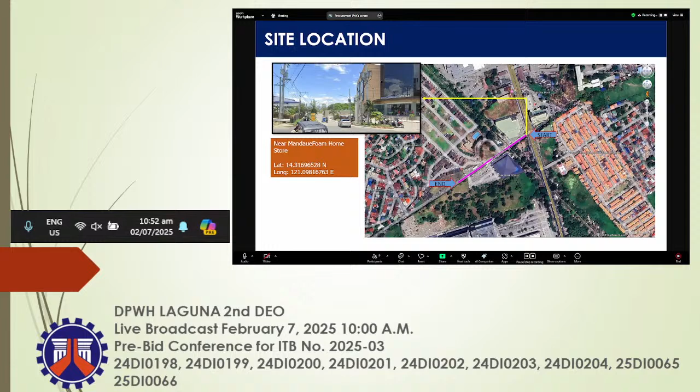For the site location, the construction is right by the overhead road, right beside the MandaueFoam Home Store. These are the site photos.

For the summary of quantities: Part A, facilities for the engineer, provision of field office for the engineer, provision of furniture, fixtures, equipment and appliances for the field office for the engineer, and provision of progress photographs. Part B, other general requirements: project billboard, signboard, occupational safety and health program, traffic management, and mobilization/demobilization.

Part C, earthwork: removal of actual structures, obstruction, 0.20 meter thick PCCP, surplus common excavation, and subgrade preparation. Part D, subbase and base course: aggregate subbase course, and Part E, surface courses: Portland cement concrete pavement, 0.23 meter, 14 days.

For the minimum equipment: backhoe with breaker, dump truck, motorized road grader, vibratory roller, concrete vibrator, bar cutter, and joint sealer machine. For the typical cross section, we have an average width of 4.5 meters, with 0.23 meter thick PCCP and 0.20 thick aggregate subbase.

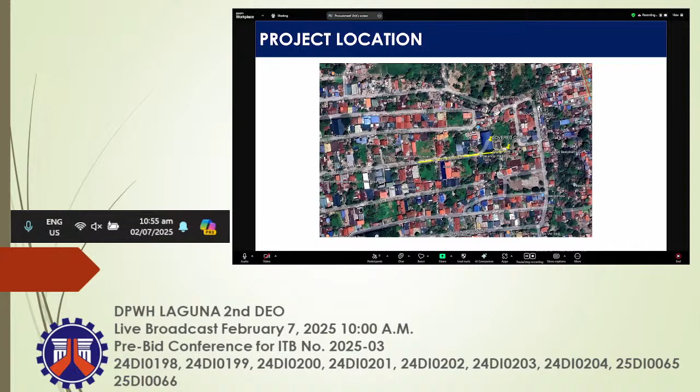For the scope of works, we have upgrading of drainage. You can see the site location here, the alignment is marked in yellow, and you can also see the outfall pipe. This is along Dia Layco Subdivision.

So for the minutes of the meeting.

For the summary of quantities, we have Part A, facilities for the engineer: provision of field office on rental basis, provision of furniture, fixtures, equipment and appliances for the field office, and provision of progress photographs. For other general requirements, we have project billboard, signboard, occupational safety and health, traffic management, mobilization and demobilization.

For earthwork, we have removal of structures and obstruction, structure excavation, common soil. Part F, bridge construction: reinforcing steel grade 40 and grade 60, structural concrete, lean concrete. For drainage and slope protection structure, we have metal frames and gratings, and miscellaneous structure, curb and gutter, precast.

This is the typical plan as presented.

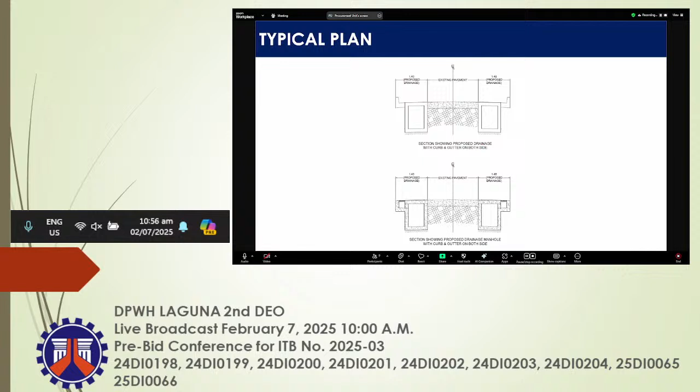For the minimum equipment required: backhoe with breaker, 1; dump truck, 2; bar cutter, bar bender, 1; concrete vibrator, 1; one bagger mixer, 1; and welding machine, 1.

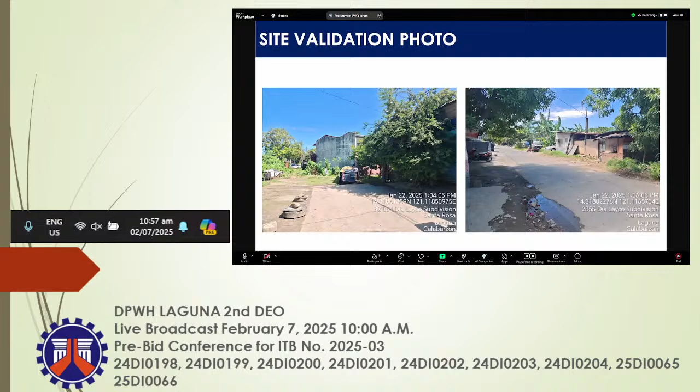And this is the site validation photo. Any questions?

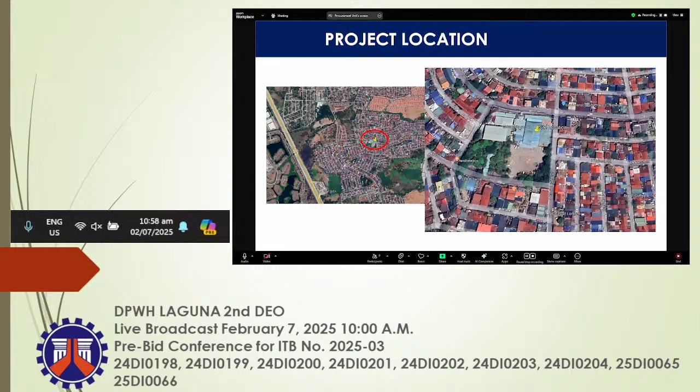This is the project location. The scope of works is the covered court; we will rehabilitate the covered court.

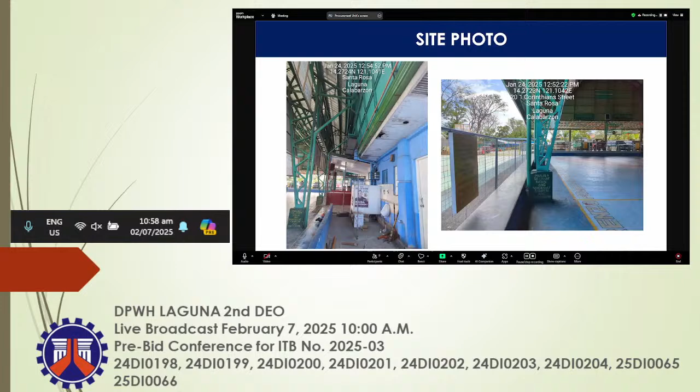This is our site, and this is the site photo. Then this is our minutes of the meeting.

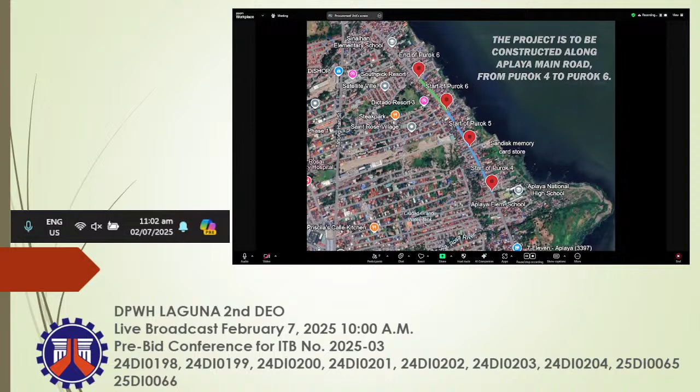Here's the picture of the start, Purok 4. The drainage at the right side from Purok 4 to Purok 5 will be upgraded to reinforced concrete box culvert. The proposed drainage shall connect to the existing drainage recently constructed by the Santa Rosa City Engineering Office.

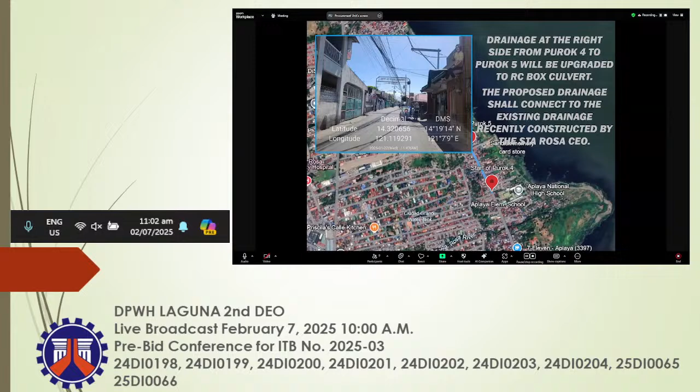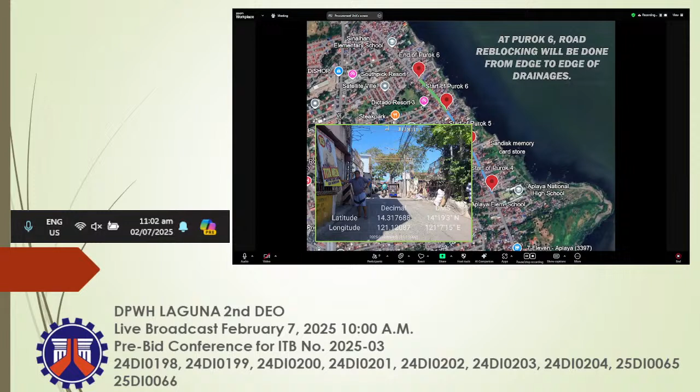For the green line, which is our reblocking, it's located at Purok 6. Road reblocking will be done from edge to edge of the existing drainages. Also, the outfall of the drainage is located at the end of Purok 6, at the bridge, the boundary of Sinalhan and Aplaya.

For the reblocking portion of the project, we will be reblocking the middle portion of the carriageway from edge to edge of both the existing drainages.

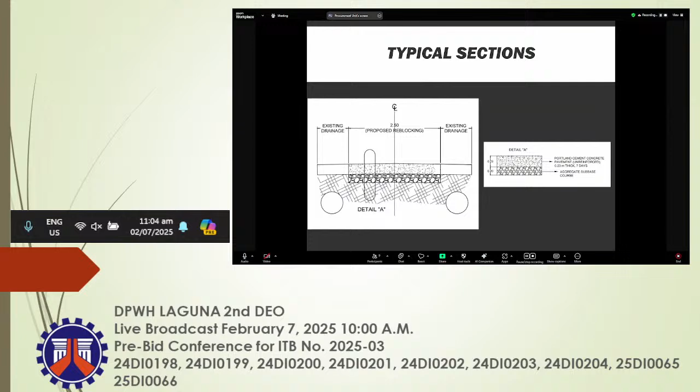As previously mentioned, we will be using 0.23 meters thick, 7 days PCCP, and 0.2 meters of aggregate sub-base course. That is all, thank you. Any questions po?

For our next project, we have construction of multipurpose building, covered court, Golden City, Barangay Dila, Phase 4, Santa Rosa, Laguna. For the project allocation, we have 15 million with approved budget for the contract of 14,850,000 and EAO of 1% equivalent to 150,000.

Duration is 210 calendar days. For the general scope, we have construction of covered court with stage and bleachers.

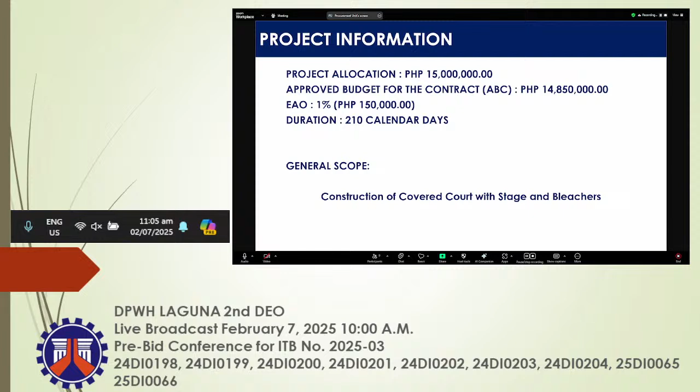For the site location, it is located within the Golden City subdivision, and you can see there the arrow. And for the site pictures, here they are.

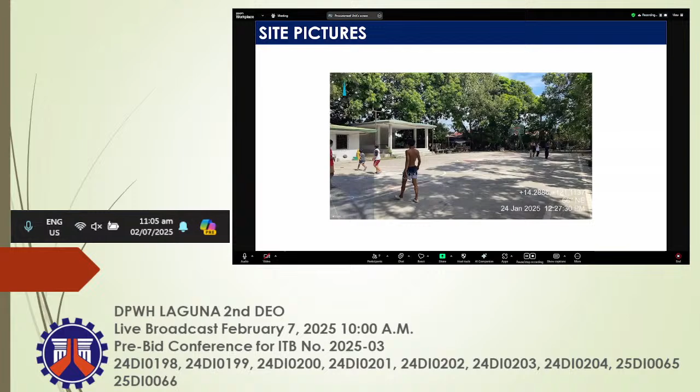We have existing concrete pavement for removal, and there the new covered court with stage will be built. So for the elevation, and here is the floor plan.

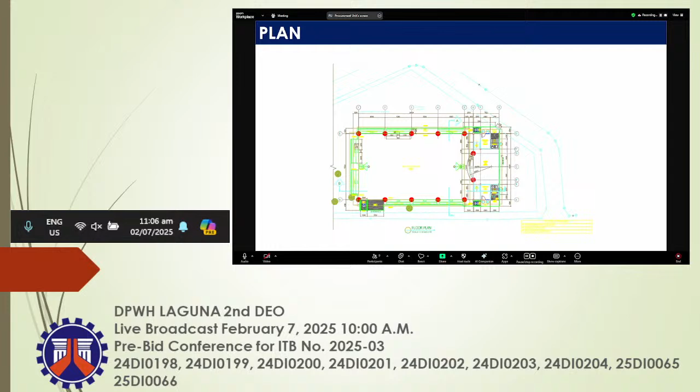For the minimum equipment, we have backhoe 1, bagger mixer 1, bar cutter and bar bender 1, welding machine 2, dump truck 1, concrete mixer 1, and concrete vibrator 1.

For the items of work, we have facilities for the engineer, construction of field office for the engineer, provision of furniture, fixtures, equipment, and appliances for the field office for the engineer, and provision of progress photograph.

For Part B, other general requirements, we have permits and clearances, project billboard signboard, occupational safety and health, mobilization and demobilization, general scaffolding, shoring, and netting.

For Part C, earthwork, we have removal of structures and obstruction, building excavation, embankment from structure excavation, and gravel fill.

For Part D, reinforced concrete, we have structural concrete 3,000 and 4,000 PSI, reinforcing steel deformed grade 40 to grade 60, and formworks and false works.

For finishing and other civil works, Part E, we have catch basin, sewer line works, storm drainage downspout, septic vault concrete, and plumbing fixtures and cold water lines.

For our floor plan, on the ground floor, here is the open space intended for parking. Then on the second floor, here are the possible offices. Then for the third floor, which is our covered court basketball court.

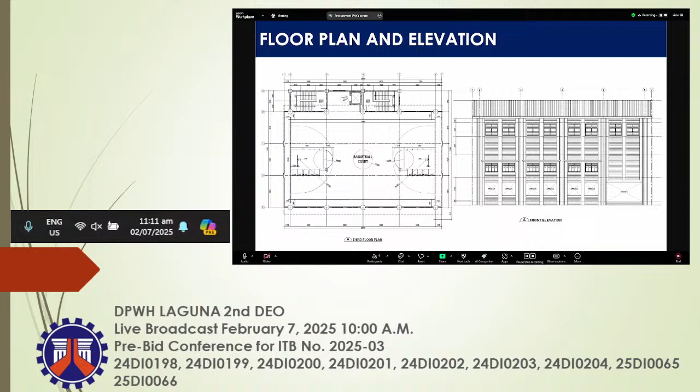Then other general requirements: permits and clearances, project billboard and signboard, occupational safety and health, and mobilization, demobilization. For Division 1, General Earthworks: removal of structures and obstruction, building excavation for common soil, and then gravel fill.

So this includes removal of the existing covered court and stage. Then for our general Part D reinforced concrete: structural concrete Class A 3000 PSI 28 days, reinforcing steel grade 40 and grade 60, and formworks and false works.

Ako na pala, 65. Hello po, good morning. I'm Engineer Jandy and I'll be presenting 25 DI 65, construction of structure for river protection

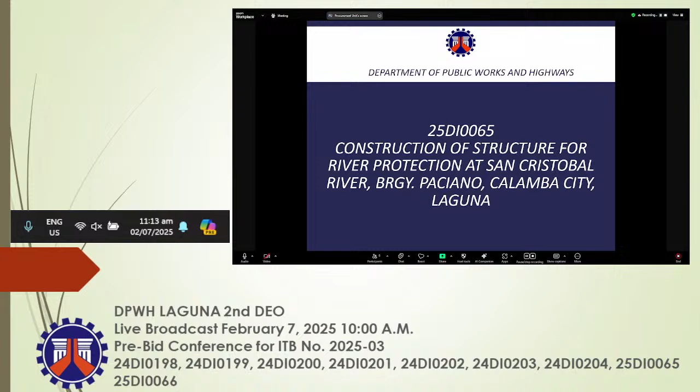at San Cristobal River, Barangay Paciano, Calamba City, Laguna. For the project allocation, project information, project allocation is 100 million. Ang approved budget of contract is 96,500,000 and the duration of calendar days is 227 calendar days.

Ang length po natin is 544.8 linear meters and the scope of works natin is construction of flood control structure with steel sheet pile. So ito po ang ating alignment. Kung mapapansin nyo po, ang landmark po natin is San Cristobal Bridge. Ito po siya sa may lower right corner po ng ating makikita mong bridge.

Ito po yung project alignment natin. So, ito po sa may lower part po, portion is meron po tayong outfall and ito po yung natin, structure. Then, ito po yung tutukuyin din po natin yung existing structure dito. Papunta dito po.

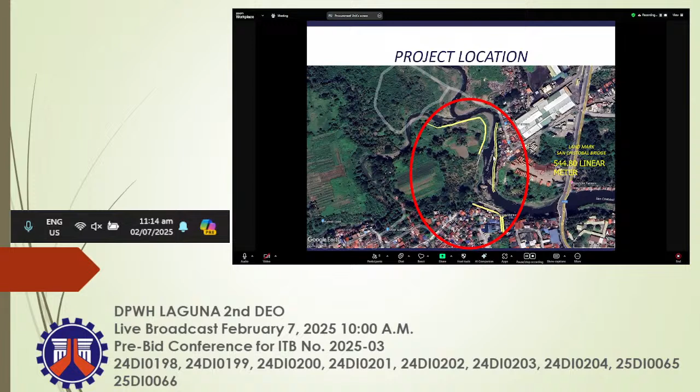Since malalagyan natin to, nilagyan natin tong side na to para sa protection din po for the current po. So possible ito po kasi yung tamaan ng current pag nagkaroon ng baha. So ito po ang ating site at project alignment.

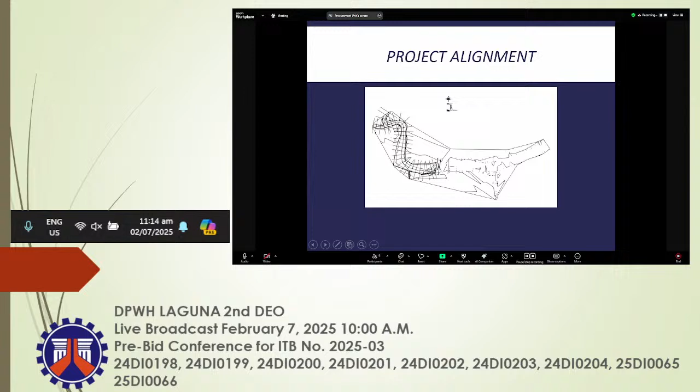Ang gagawin natin is open yung outfall, then maglalagay tayo ng retaining wall sa gilid po ng outfall, para ma-secure natin yung tubig at mag-flow pa rin siya papunta sa ilog. Yun yung nakita kong problem dito po.

Then, kung makikita, ang possible access po is nandito po sa area po na to. Ito po, may end of road po to, pero pwede siyang diretsuhin, makakapasok yung equipment natin papunta dito sa site natin. So, ayan po yung site.

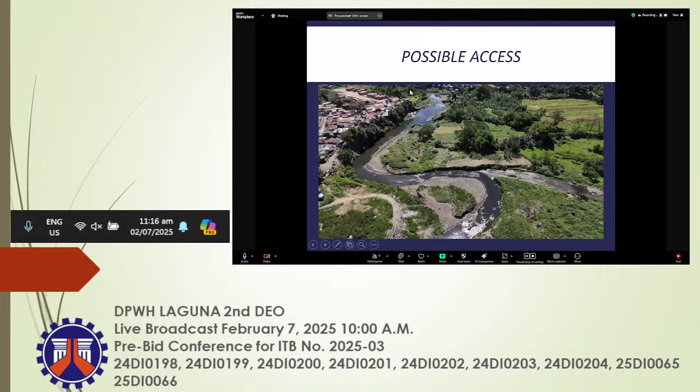Ayan po ang crossover, ito po yung site validation. Nung time na yun, nakipag-meeting tayo dun sa landowner kung pwede tayong makipag-access doon. Pumayag naman siya, so ito po yung access.

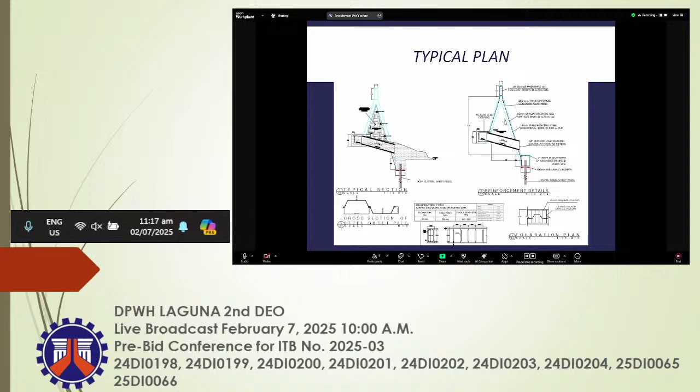Then, sa typical structures po natin, tatlo po ang typical structure natin. Nag-varies po siya depende sa elevation ng contour ng lupa. Meron tayong double berm, may single berm po tayo, and dun po sa area ng outfall is ito po yung gagamitin natin. Since mababa po yung lupa sa kabila, magda-dike type po tayo na meron tayong drainage to accommodate the flooding dun sa likod ng structure.

Ang minimum equipment po natin is 1 backhoe, 2 dump trucks, 1 vibro hammer, 1 welding machine, 1 bagger mixer, water truck and slash pump, and 1 payloader.

Ang summaries of quantities po natin is yung typical na makikita po sa flood control natin. Mayroon tayong Part A, facilities for the engineer. Part B, other general requirements. And Part C, earthworks, dito pumasok yung removal of structure.

Ito po, i-remove po natin yung mga tumaob na flood control structure. Then Part D is yung reinforced concrete, so nandito na po yung papasok ang reinforcing steel, structural concrete, and lean concrete.

Then sa flood control din natin, mapapasok din yung sa earthwork is yung clearing and grubbing, surplus, common excavation, and embankment from structure. Then sa Part LB, bank and slope protection works.

Dito papasok yung steel sheet pile natin. And sa Part LC, ang drainage work, dito po yung papasok yung pipe culvert natin and yung rectangular flap gate po natin, so this will prevent the backflow from coming sa ilog. Thank you po.

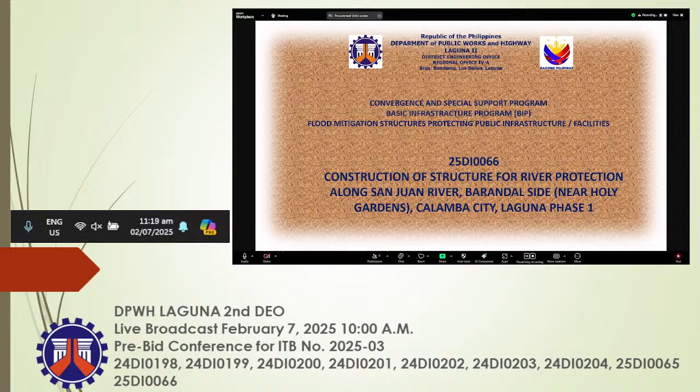Good morning. I'm Engineer Loli Villarroyo to present 25 DI 0066, construction of structure for river protection along San Juan River, Barandal side, near Holy Gardens, Calamba City, Laguna, Phase 1.

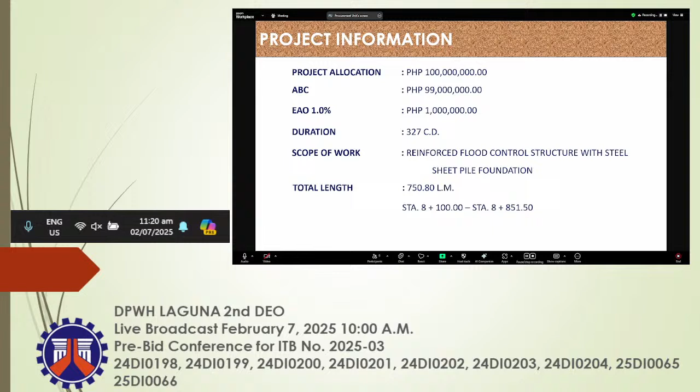For the project information: allocation of 100 million, ABC of 99 million, EAO 1% equivalent to 1 million, duration of 327 calendar days. Scope of work: reinforced flood control structure with steel sheet pile foundation with total length of 750.8 linear meters.

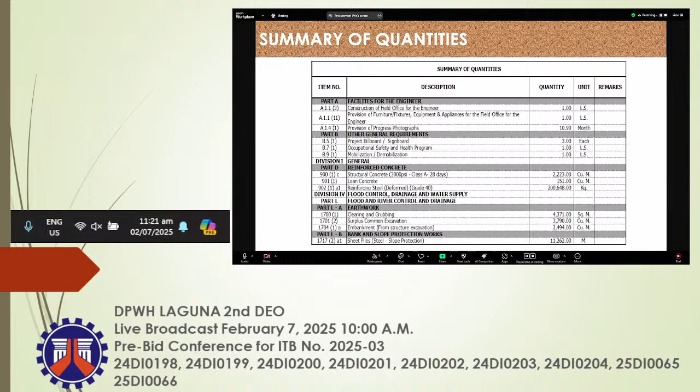For Part D, reinforced concrete, we have structural concrete, lean concrete, reinforcing steel. Part LA, earthwork: clearing and grubbing, surplus common excavation, embankment. Last, Part LB, bank and slope protection works: sheet piles. For the minimum equipment requirement, we have backhoe 1, dump truck 2, vibrohammer 1, welding machine 1, bagger mixer 1, water truck pump 1, payloader 1.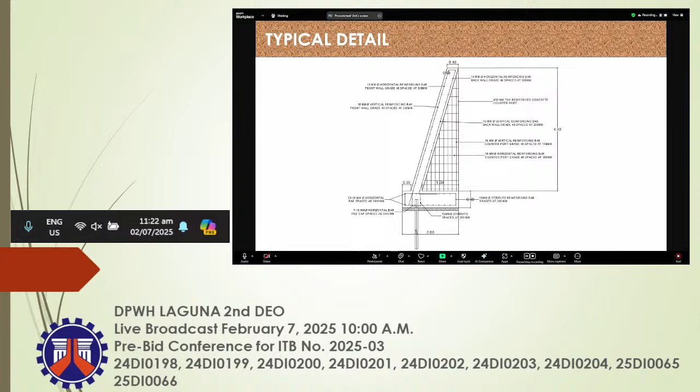Coordination meeting with the Kapitan, Kagawad, and engineer of Holy Gardens. This is also our site access. Then for the site videos, that's the start of our project. It's a boundary of Barandal.

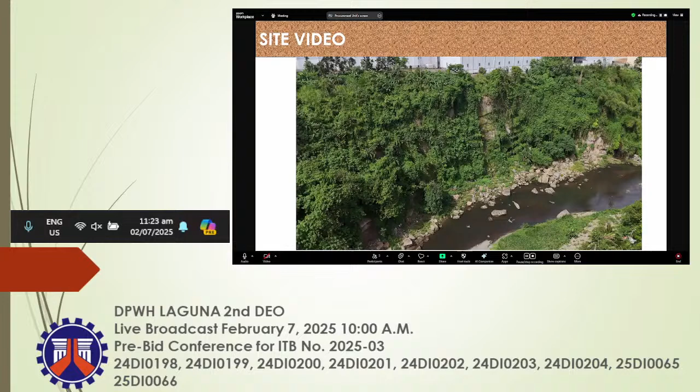So, minutes of the meeting. As per Kap, priority is the part near the houses. Any questions? Thank you.

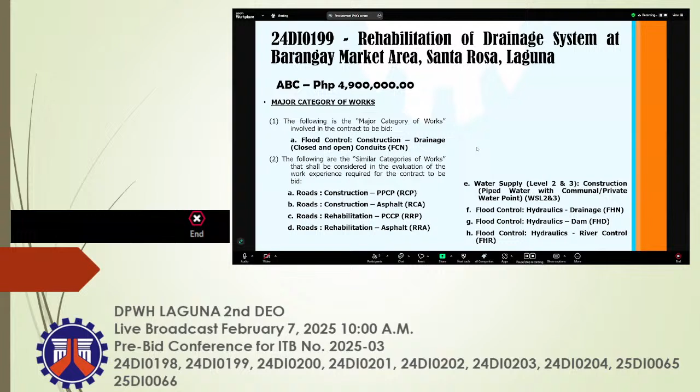For the second project, rehab of drainage, barangay market area, Santa Rosa, with an ABC of 4,900,000. The major category of work is flood control, roads, and water supplies. If interested to join, PCAB license should have a category of C and D and classification of small B.

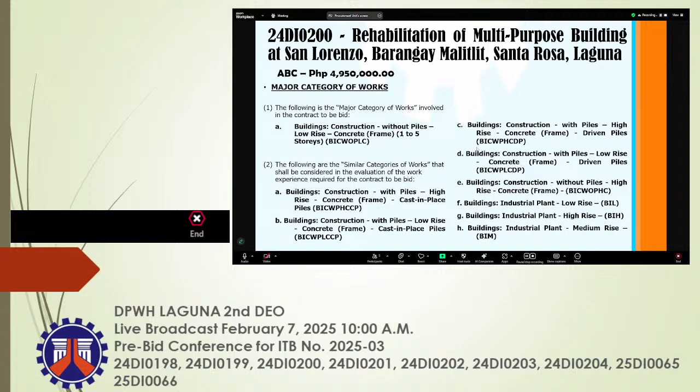For the third project, rehab of multipurpose building, San Lorenzo, Barangay Malitlit, with an ABC of 4,950,000. Major category of work is buildings. If interested, your license category should have category of C and D and classification of small B.

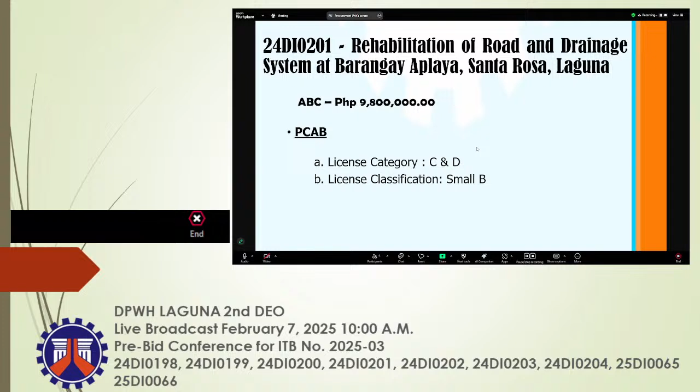For next project, rehab of road and drainage system Aplaya, ABC of 9,800,000. The major category of work is flood controls and roads with water supplies. If interested, PCAB license should have category of C and D and classification of small B.

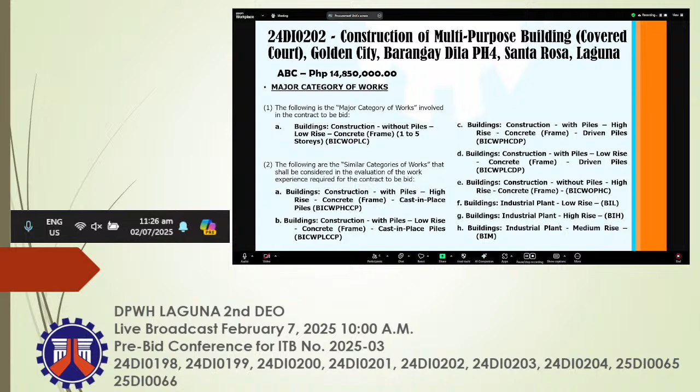Next project, construction of MPB, covered court, Golden City, Barangay Dila, Santa Rosa City, with an ABC of 14,850,000. The major category of work follows buildings. If interested to join, your PCAB license should have a category of C and D and classification of small B.

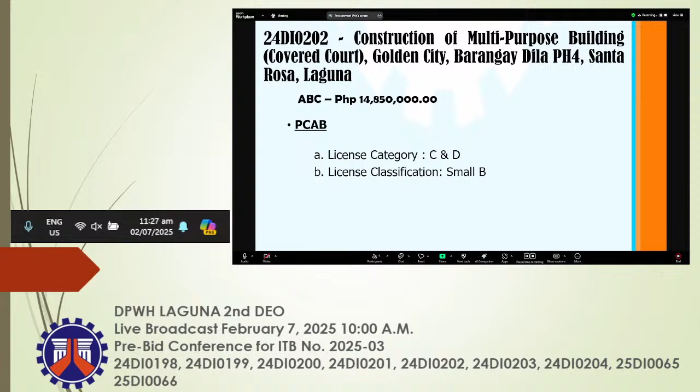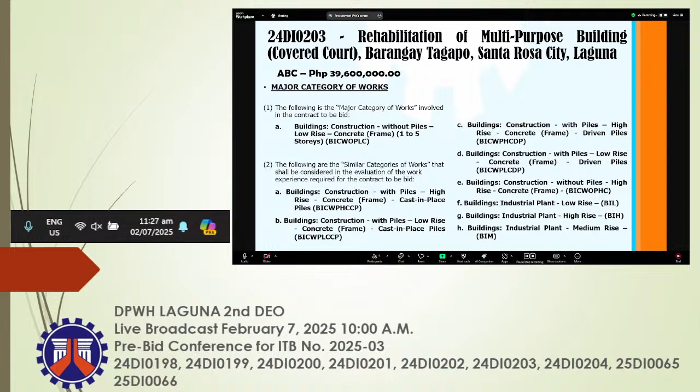For the next project, rehab of multipurpose building, covered court, Barangay Tagapo, Santa Rosa City, with an ABC of 39,600,000. The major category of work again is buildings. If you are interested, your PCAB license category should have B and classification of medium A.

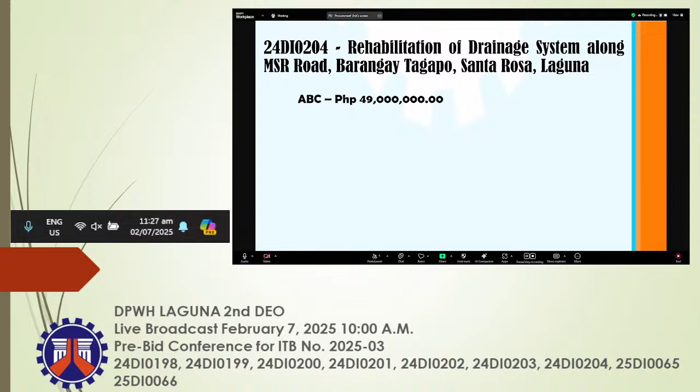Next project, rehab of drainage system along MSR Road, Barangay Tagapo, Santa Rosa, Laguna, with an ABC of 49,000,000. Oh, this is cancelled, sorry. This is cancelled, next project na lang.

This is what Ma'am Jane discussed earlier in Supplemental Bulletin 2025-05.

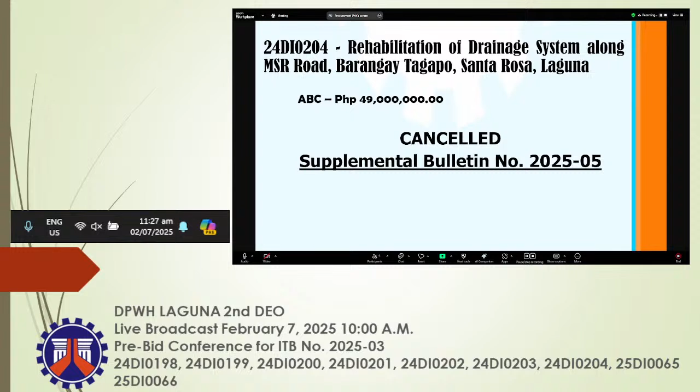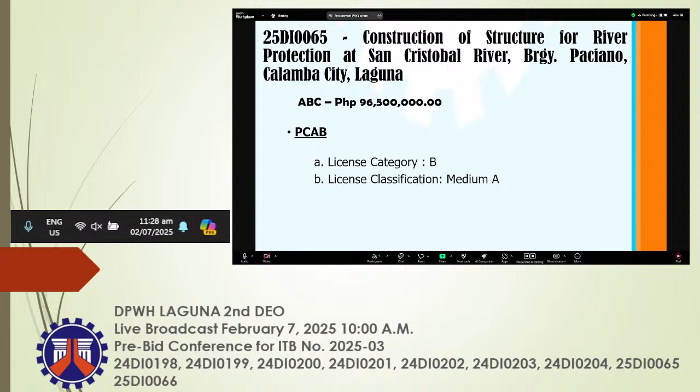Next project is 25DI-65, construction of structure for river protection at San Cristobal River, Barangay Paciano, Calamba City, with an ABC of 96,500,000. The major category of work are as follows: flood controls, road, ports, and hydraulics. If you are interested to submit your bid, your PCAB license should have a category of B and classification of medium A.

Next project, 25DI-066, structure of river protection along San Juan River, Barandal side, Calamba City, Phase 1, with an ABC of 99 million. The major category of work is flood control with roads. If you are interested, your PCAB license should have a category of B and a classification of medium A.

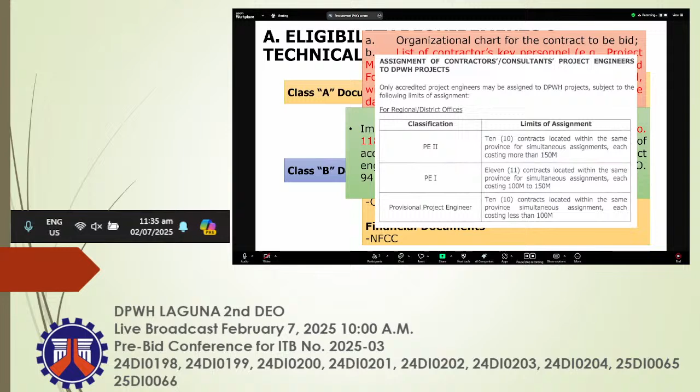For regional/district offices, for the classification PE2, the limits of assignment are 10 contracts located within the same province for simultaneous assignments, each costing more than 150 million. For PE1, 11 contracts located within the same province for simultaneous assignments, each costing 100 million to 150 million. For provisional project engineer, 10 contracts located within the same province, simultaneous assignment, each costing less than 100 million.

Original duly signed omnibus sworn statement, or the OSS, and if applicable, original notarized secretary certificate in case of a corporation, partnership, or cooperative, or original special power of attorney of all members of the joint venture giving full power and authority to its officer to sign the OSS and do acts to represent the bidder.

For the NFCC, or the net financial contracting capacity of the bidder, shall be used in the eligibility processing. Prospective bidder must have an NFCC at least equal to the ABC to be procured as follows.

The NFCC equals current assets minus current liability, times 15, minus the value of proportions of all outstanding works under the bidder's ongoing contracts, including awarded contracts to be started, which portions coincide with the contract to be bid. In the NFCC, the fixed factor of 15 shall be used in the computation regardless of the contract duration.

For the Class B documents: the special PCAB joint venture license and valid joint venture agreement, if applicable; duly signed joint venture agreement or JVA in accordance with RA number 4566 and its IRR, in case the joint venture is already in existence; or duly notarized statements from all potential joint venture partners stating that they will enter into and abide by the provisions of the JVA in the instance that the bid is successful.

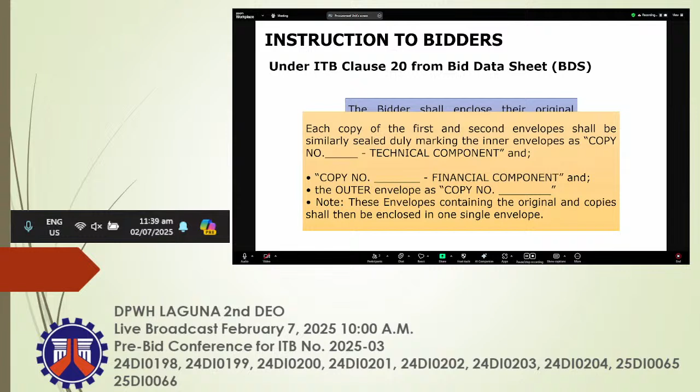The bidder shall enclose the original eligibility and technical documents in one sealed envelope marked 'Original Technical Component', and the original of their financial component in another sealed envelope marked 'Original Financial Component', sealing them all in an outer envelope marked 'Original Bid'. Each copy of the first and second envelope shall be similarly sealed, duly marking the inner envelopes as 'Copy Number _ Technical Component' and 'Copy Number _ Financial Component', and the outer envelope as 'Copy Number _'. Note, these envelopes containing the original and copy shall be enclosed in one single envelope.

Inclusion of the minimum materials testing equipment in the technical component of the bid.

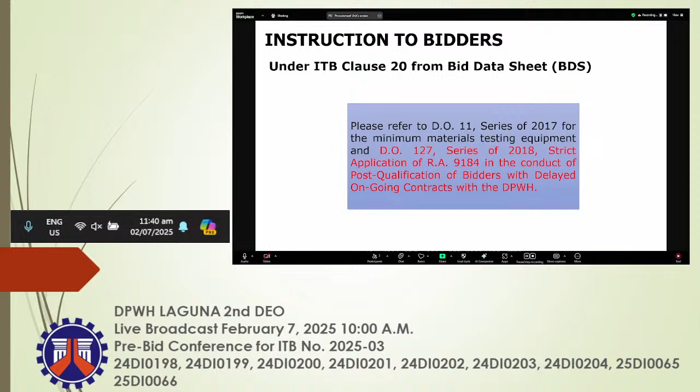Electronic submission and receipt of bids.

Legal references: Department Order Number 87, Series of 2020, electronic submission and receipt of bids for the procurement of civil works contracts; GPPB Resolution Number 09-2020, dated May 7, 2020, approving measures for the efficient conduct of procurement activities during a state of calamity or implementation of community quarantine or similar restrictions, authorizing the submission and receipt of bids through electronic means or email.

2016 Revised IRR of RA 9184, electronic submission and receipt of bids procedures.

Number 1: Post the invitation to bid and bidding documents. Responsible person: BAC Secretariat. Rules: must be posted on the DPWH and PhilGEPS websites and at any conspicuous place for 7 calendar days per Section 21 of the IRR of RA 9184.

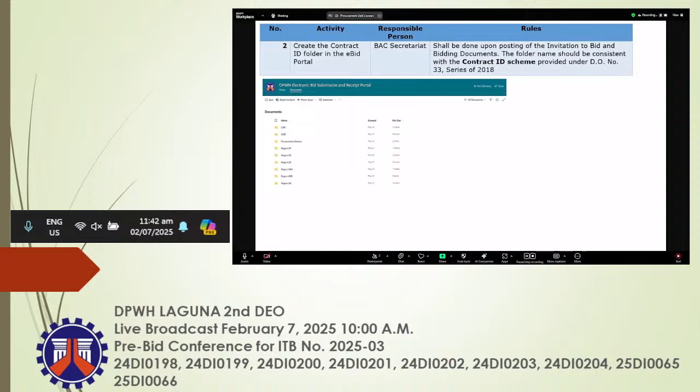Number 2: Create the contract ID folder in the eBid portal. Responsible person: BAC Secretariat. Rules: shall be done upon posting of the invitation to bid and bidding documents. The folder name should be consistent with the contract ID scheme provided under DO number 33 series of 2018. Here are the examples.

Number 3: Purchase the bidding documents. Responsible person: contractor. Rules: Section 17.4 and Appendix 8, guidelines on the sale of bidding documents of the IRR of RA 9184.

Number 4: Send the proof of purchase of bidding documents, official receipt. Responsible person: contractor. Rules: item number 3A of DO number 87 series of 2020. File format: PCAB ID underscore contract ID underscore official receipt dot PDF. Email subject format: official receipt for contract ID. Must be in PDF, must be sent prior to the deadline of submission of bids. Only bidders with system-accepted proof of payment shall be allowed to submit their electronic bids. Here are the examples.

Number 5. Send the electronic bid. Responsible person: contractor. Rules: Item number 3D, 3E, 3I, and 3M of DO number 87 series of 2020. File format: PCAB ID underscore contract ID underscore B.zip or .rar/.7z. Email subject format: Bid submission of contract ID. Must be in a password-protected archive format, containing 2 password-protected archive files, the technical and the financial proposal.